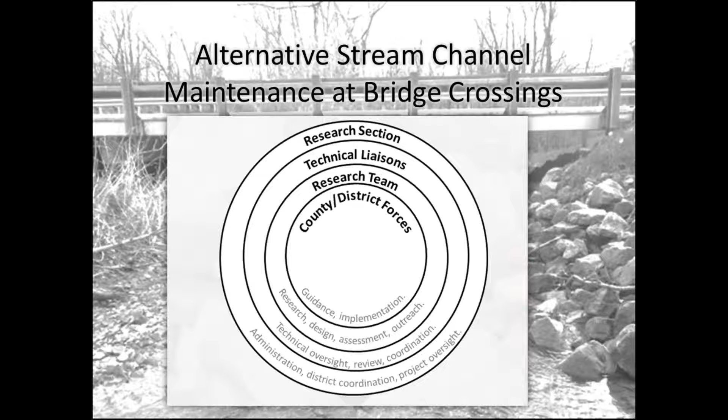The really interesting thing is they started to throw in their ideas. They helped us innovate some of the processes, some of the materials we looked at, and they came up with ideas, and they really contributed to this research in a big way to make sure it was something implementable in the end. So we're greatly indebted to the folks in the counties and districts that participated in this, sometimes even though they were fairly skeptical, but I think we got to a workable endpoint, and now we're going to share some of those projects with you.

Our objectives: first, we needed to assess what were ODOT's current capabilities and the practices they use to do maintenance at stream crossings. So what do they currently do? But also what kind of materials can they gather for these projects? If we're going to ask somebody to do something different, it might require different materials. What sort of equipment do you have to do the work? What's the skill of the workforce to do this sort of thing? So that was our first step, to assess what current capacities were.

And then we started to do the literature reviews. We looked at our experience in the stream restoration field, what sort of practices could we bring to bear to come up with more sustainable maintenance solutions at bridge crossings, where streams were impacting foundations, abutments, the embankments. After we went through and got a fairly narrow list of projects that seemed doable, how do we develop a decision aid or a tool to help guide engineers or county workers towards the right practice to address a particular problem?

We worked with EMH&T to put the designs on paper, get feedback from the counties, but then also go through some of the permitting processes that were required because this was federal funding. This is a point where Dan came in and worked very extensively on site with each of the counties to implement these projects. And then he's documented that whole installation process as well as how the sites are progressing since they were installed.

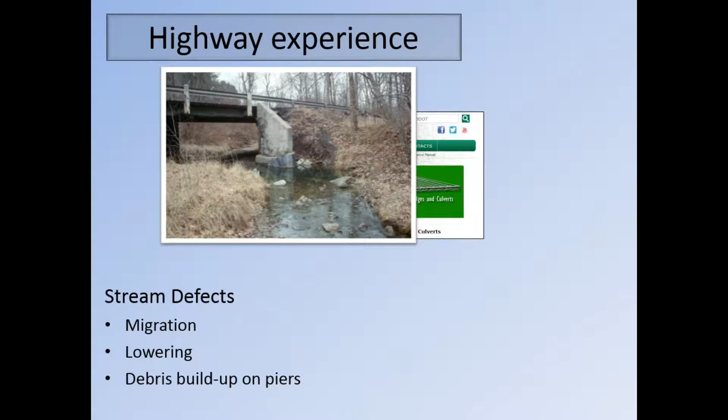So here we go - here's the migration issue. You can see the outer banks eroding into the embankment, causing a problem for the stability of that bridge. Here we have an example of lowering, more sediment being transported than can be supplied, which could cause an issue for stability, as well as debris buildup on piers. You see a lot of this - I know the county maintenance forces are challenged by some of this, clearing log jams so they have adequate capacity and can limit flooding and stresses on the structure.

And there's a lot of guidance out there on how to deal with this. In fact, they're all throughout the peer-reviewed literature, government documents, HEC 23, Bridge Scour - literally thousands upon thousands of pages of things that could be done to address this, and it's almost overwhelming to the point where someone trying to address these issues can get lost in all of this. So what do you do? What's applicable in this region? What are the sort of things that we can pull off? So we help sort through that.

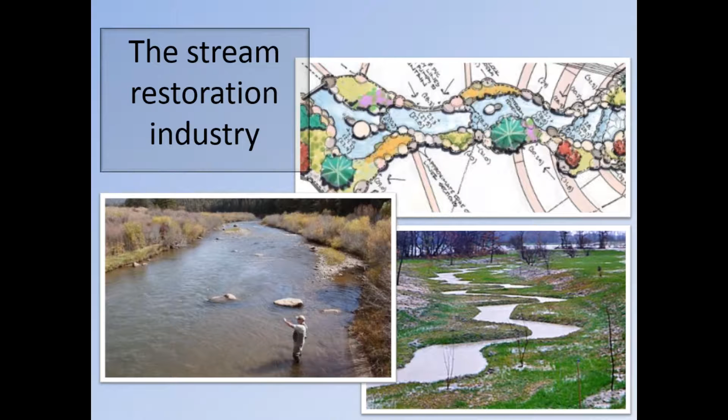A lot of the techniques you're going to see were developed in the stream restoration industry over the past 20 years. A lot of this started out with wealthy landowners wanting to improve the stream habitat for trout, so a lot of the early designs, biologists and ecologists were involved in this sort of thing. But what can we pull from all of that? This is literally a $1 billion stream restoration industry.

A lot of techniques are developed - I know developers now, when they develop a piece of property, may be required to do stream restoration, oftentimes hundreds or thousands of dollars per linear foot. But what sort of lessons can we pull out of all that work and say what applies to streams at bridge crossings, to smoothly transition flow, to transport not only the water and the sediment, and do that in such a way that's going to protect that structure, protect the public, the traveling public.

One of the practices we can adapt is actually guiding the flow. So if you think about that migration issue, are there things we can do to shift and direct flow to keep it smoothly transitioned under that roadway? And vanes, things like cross vanes, J hooks, W weirs - you'll see examples of those in our project coming up. They're able to gently, smoothly transition that flow to where we want it to go.

Here's an example of a cross vane. You can see it's higher on the outer side, lower in the center, and at the bottom there's a flood event. You can see it's directing all of that flow underneath the bridge.

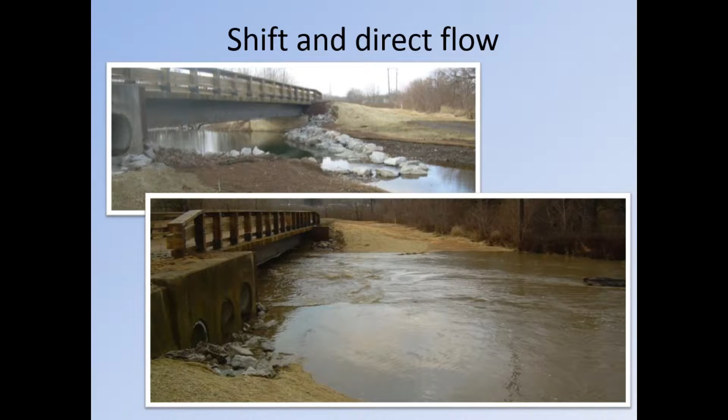The other category of projects we think has a lot of applicability around bridges is the idea of two-stage channels. In an area I work in, up in northwest Ohio, there's a lot of agricultural drainage, and a lot of channels are designed to be trapezoidal, overly wide channels. What we've noticed over time is nature will come in and essentially build a small channel within the larger channel.

That's nature's way of trying to heal itself, to create this compound channel form. The inset channel will usually have faster flowing, deep water because vegetation isn't in there. It's narrow and deeper, and that keeps the sediment moving through.

So how can we use that example at bridge crossings to come up with more stable cross sections?

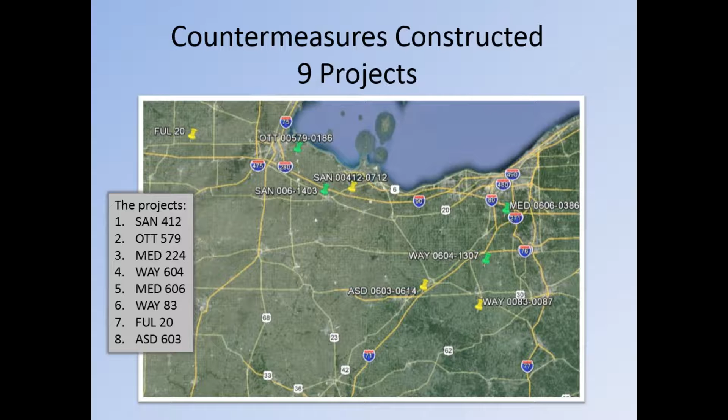There have been 9 different projects implemented as part of this research, and I'm going to turn it over to Dan here to talk about it. You can see they've been across districts 2 and 3, essentially most of the northern half of Ohio, covering 2 different types of areas: a more hilly, rolling terrain in the eastern part, and a flatter terrain up in the northwestern part. I'm going to turn it over to Dan to tell you about each of those projects.

Forgot your coffee, John. Yeah, I'm coming in on the middle of the presentation, and I came in on the middle of the project too, after all the nasty meetings, environmental permitting, and plans and specifications were taken care of. I got to come in and play on the projects. So that's what I'll talk about, these 9 examples where we're applying these concepts that John and I and the team have from a stream morphology, stream form and function background, applied to bridges.

So let's look at 9 projects. This is the first one, and it's in the kind of area where John and I have had a lot of experience: that flat agricultural drained landscape. We certainly know this terrain up in Sandusky County, where bars form and cause capacity issues with the bridge at this site. Let's see if we can get our tech running here.

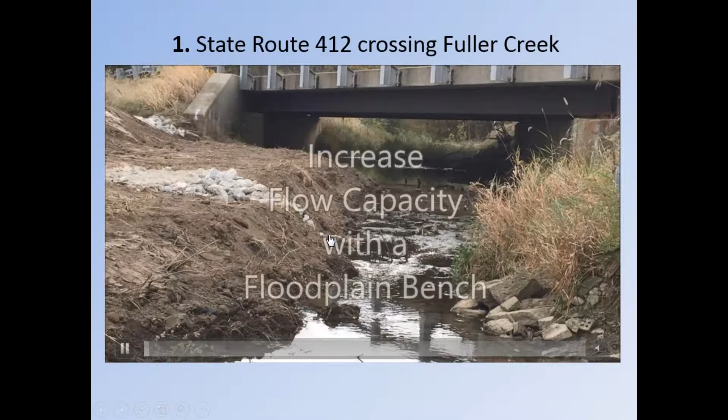I've got videos created for each of these 9 projects. I'll run through 2 of them completely so you can see what they are. For the others, we won't look at so much video, but we will get those posted eventually.

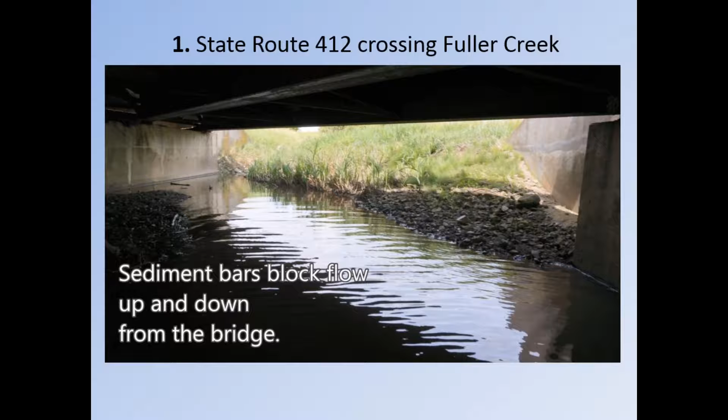Skipping forward and back through this video, we can apply the concept of the inset channel to this landscape, where we have significant deposition obstructing the capacity of the bridge. This graphic shows the height of the bar, extending from one side all the way over, really reducing the capacity of the bridge and causing alignment issues with the channel eroding the far bank, looking downstream.

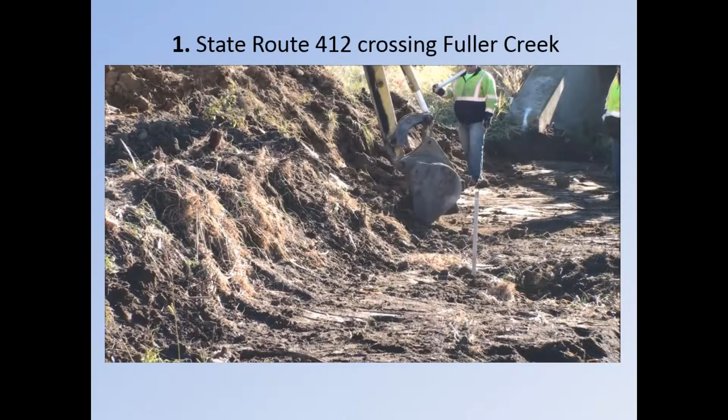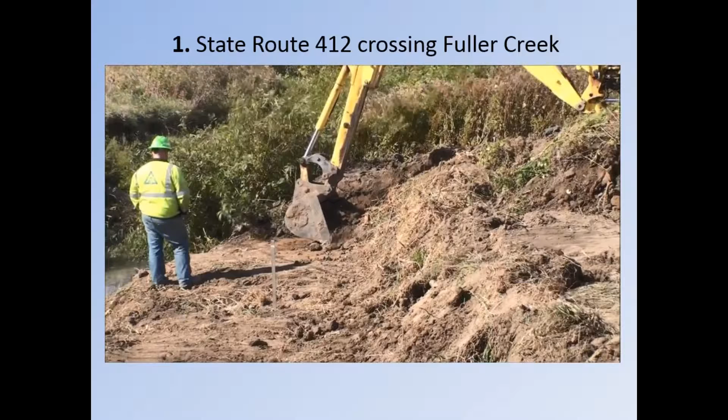So what we do, it's not very exciting, but we dig not all the way down to the stream bed to regain that capacity, but just down to the floodplain stage. That's a very fundamental concept in stream morphology—if we can say nothing else besides this concept of a bankfull channel and floodplain, that's what it looks like in this situation: incorporating that compound channel form so that the low and intermediate flows aren't spread out across the whole base, but confined to that narrower channel. The narrowness isn't so important, but what the narrow gives you is depth.

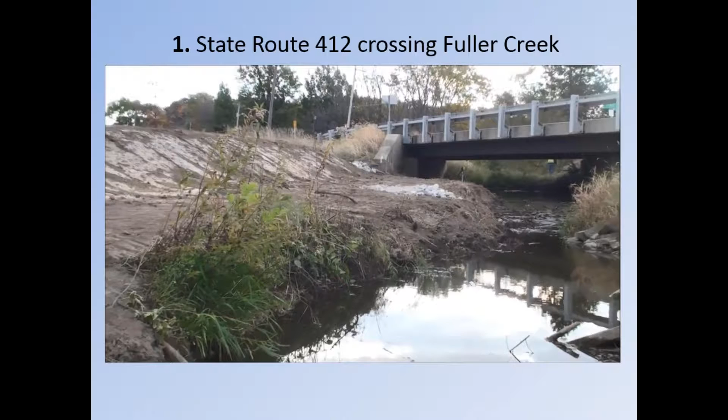Depth of flow gives you sediment transport. So all these low and intermediate flows, which are really about half of the sediment transport through this channel, are going to be concentrated in the deep section, and the sediment transport is going to be improved by this compound channel form.

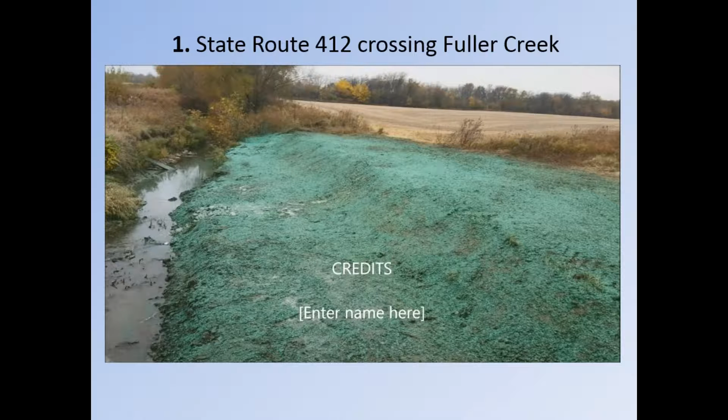So that's what it looks like at this project. Very, very simple. I think I spent the entire time out there, 3 days with the crew, but I don't think I did more than 15 minutes of work. I just think, don't dig any deeper than this, and just pull it back. It's very straightforward.

Simple application of stream morphology to a bridge project. Moving over to Ottawa County, we came in on the tail end of a bigger project here, part of just the stabilization of it, but most of the project was redoing the piers that were badly corroded. And after all that work, the side slopes needed to be stabilized.

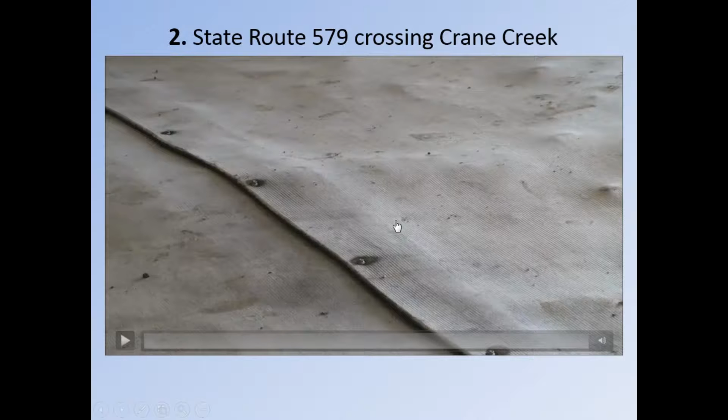You know about stabilizing these side slopes where there's not much clearance, and is there any other way we can come in with materials that might be available to do that and get in there where equipment access might not be so easy. So on this project, we used concrete cloth, which is a really cool material. It's flexible, comes in a roll, and you unroll it, put water on it, and it turns into hard concrete. It's about a half-inch thick, cuts like that, and you can move it around fairly easily with hand labor and a bit of equipment, under the deck.

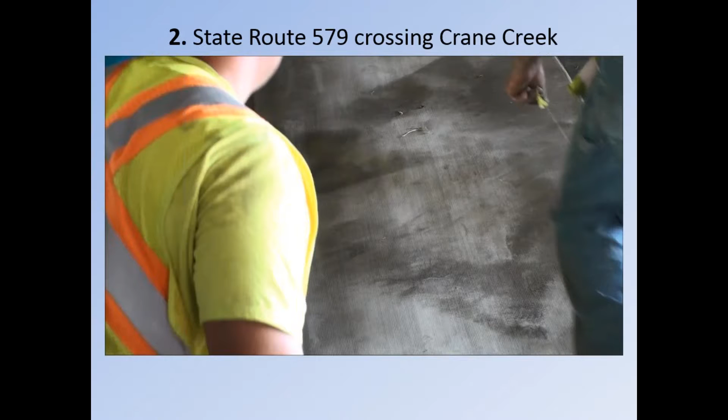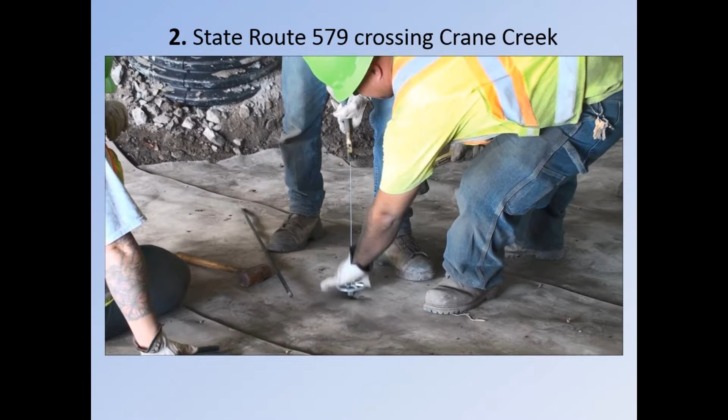Put fasteners just to keep it in place and keep each of the sections that are shingled together, so it doesn't take a lot of strength. It has mass to it, so the water's not really going to be exerting a lot of force on it. And so far, we've had a number of high flows across it, and it seems to be stable. It was certainly easy to put in, so probably not a bad tool to have in the toolbox in special cases where you're dealing with limited clearance like that.

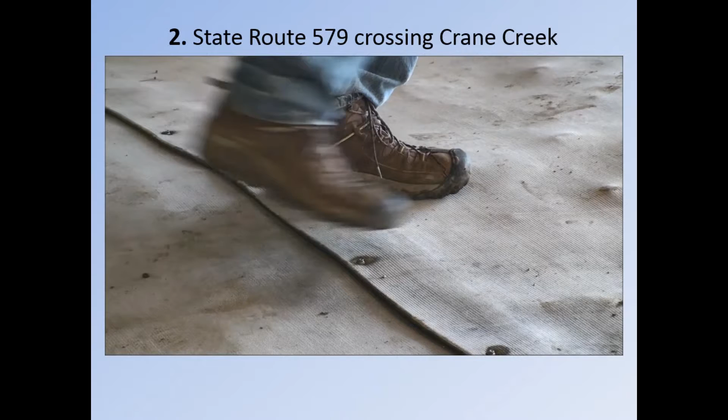Just saturating it - it's concrete within kind of a honeycomb sandwich between two cloth layers. So after it dries, it's hard concrete. You can walk on it with water going. You wouldn't want to drive equipment over it, but it's concrete that's half-inch thick.

And then, of course, it's just that sheet, so you have to key the upstream edges and make sure the water doesn't get underneath it - that would be a probable mode of failure. So that's what that one looks like, and you can kind of see what the videos are about there too.

The other application we had for that material - we liked it so much - was inside of culverts, certainly in access issues here, and where we have corrosion or abrasion of the culvert, particularly corrugated metal pipe, and particularly where you've got messy situations and water, and you might not want to go in and just put tar on it to stop the corrosion. Rolling this stuff out and fastening it to the metal pipe to line the culvert stops the abrasion certainly, and reduces the oxygen back where there's corrosion. Fairly simple application that's been done on 2 projects in Ohio now that I know of, and another application of the concrete cloth.

Now we're getting into some more fun stuff, which is really a very typical kind of issue in northern Wayne County, where it's a stream that has migrated. Streams move. Streams are dynamic systems. We don't call stable streams things that are static - we call their stability a dynamic equilibrium. Meanders move. Outside bends erode, inside bends deposit.

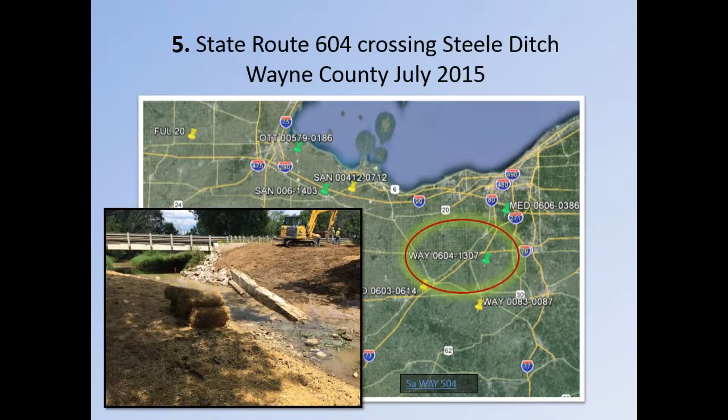Well, the standard practice that's really used for directing flows in stream restoration, that's risen to the top of all the different kinds of practices that are tried, are these vane structures. It's that shape constructed on one bank to direct the flow. Let's see if we have a video of that one - it'll be the kind of the longest project video that we have, but we'll see how those project videos are going to look on this one as well.

So we define the problem at the site, where it's the lateral migration of the channel. The channel's moved from where it was originally, which is now causing alignment issues at the bridge, and scour around the abutment, where continuing maintenance issues are going in and trying to take that abrupt turn and put rock on it and maybe trying to straighten it out. But it's an ongoing problem from that misalignment now. So the first thing we do is realign the channel.

And then the vane structure will be used to keep it in that position. Any material can be used for the vane structure.

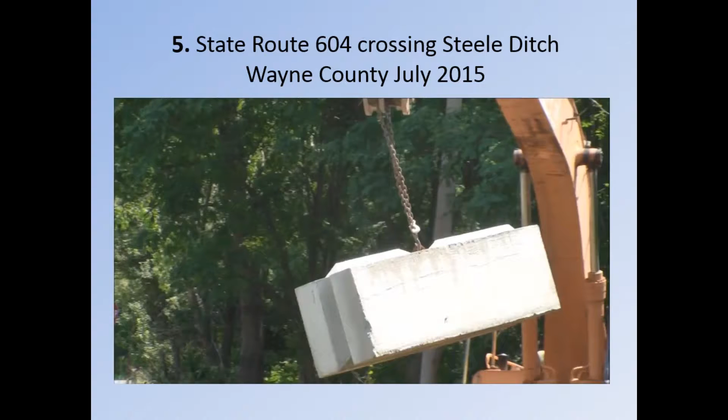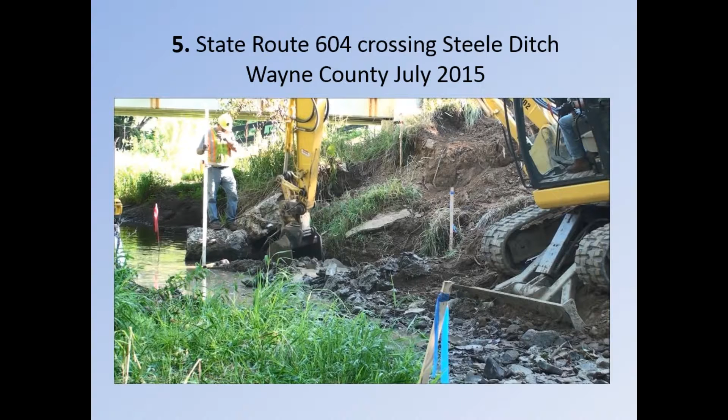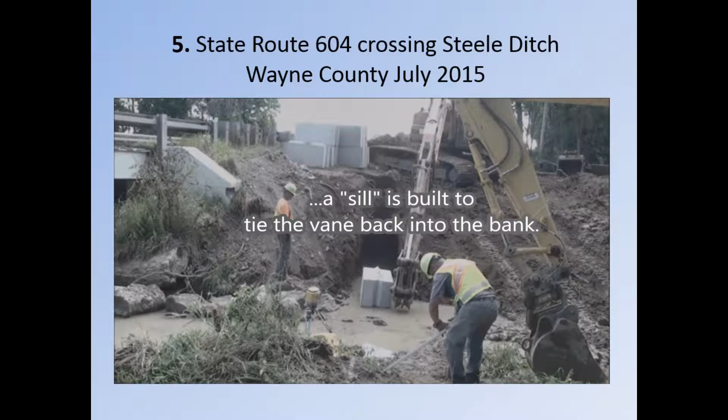Logs are often used. Out west, they use big granite boulders and excavators with thumbs on them to try to stack up those bowling balls of rock. It's a mess to try to make these things out of rock, that's what I say now after working on these projects. Whereas at ODOT, a couple of people said, why don't we just use these big rock blocks, or concrete blocks? And yeah, that's absolutely outstanding material for building this structure. But if you're not trying to build something in a park for aesthetics or ecologically, then from an engineering perspective, the block is just a superior material.

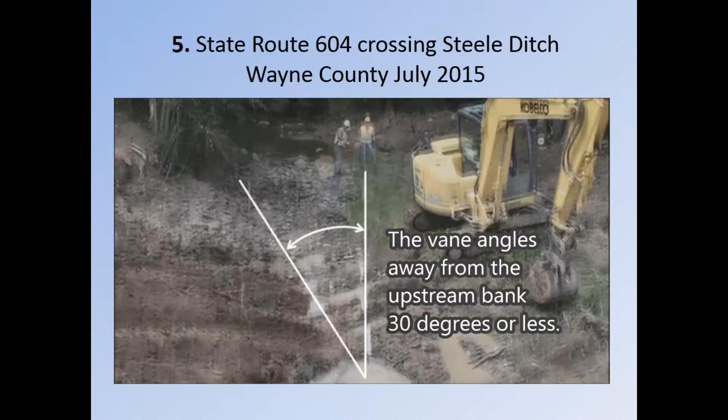This vane is constructed slightly upstream from the bridge, so we're creating a sill back into the bank. The other option is to bring the vane all the way to the bridge itself. The geometry of these things is pretty well refined and modeled, and we've got that angle off of the bank that's been shown should be between 20 and 30 degrees. It's been found to be optimum.

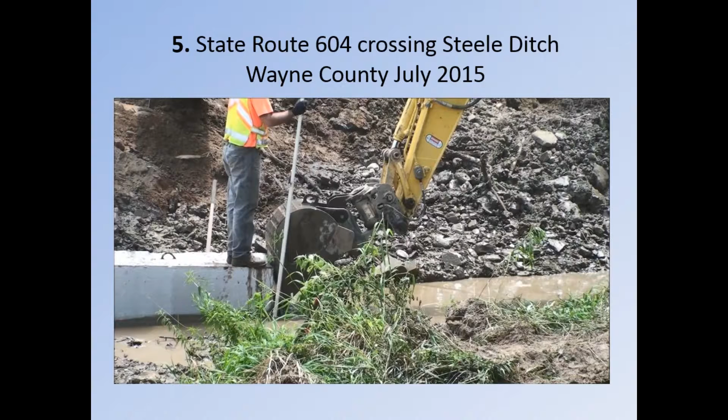They're constructed at a slope with the highest point downstream at about the top of the bank on the downstream end, and then tapering down into the stream bed as it goes upstream at no more than a 7% slope. So 2 to 7% slope is what the slope is, and a 20 to 30 degree angle off the bank, that's the geometry we're looking for. And yeah, it's easy to do that with these blocks.

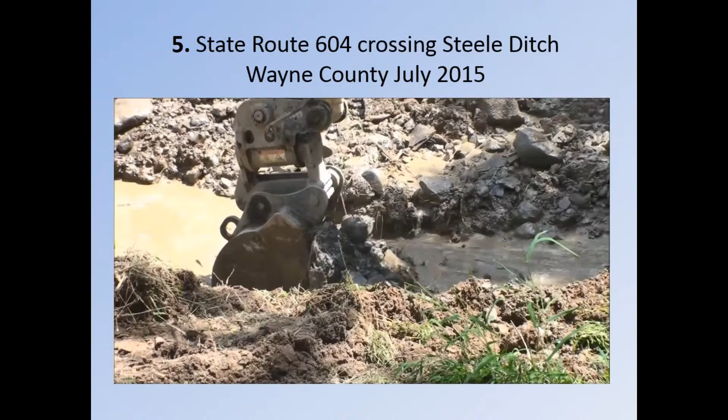Working in the water on this project is certainly one option. Water management winds up being a big deal. In different bed materials, it can be real problematic. So the constructability of these things almost comes down to what are you going to do managing the water at your work site. We tried constructing first just in the water, but decided that was hard enough to work blind down in the muddy water, so we wound up getting a pump to finish this project off. I'm going to start skipping ahead here.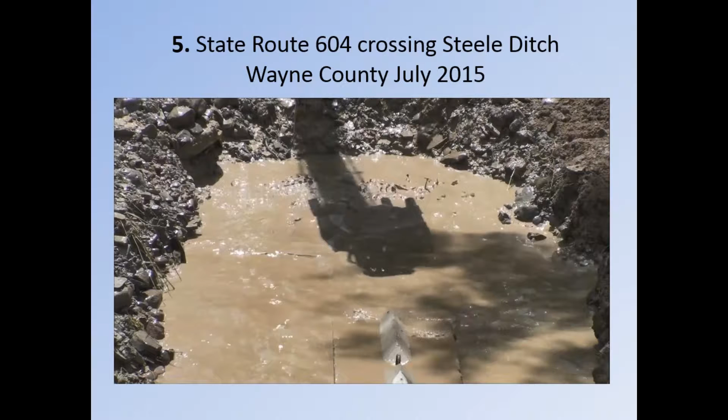And backfilling behind the block, so you stagger the next row up, back behind the footer row, which is what we'll call that bottom row.

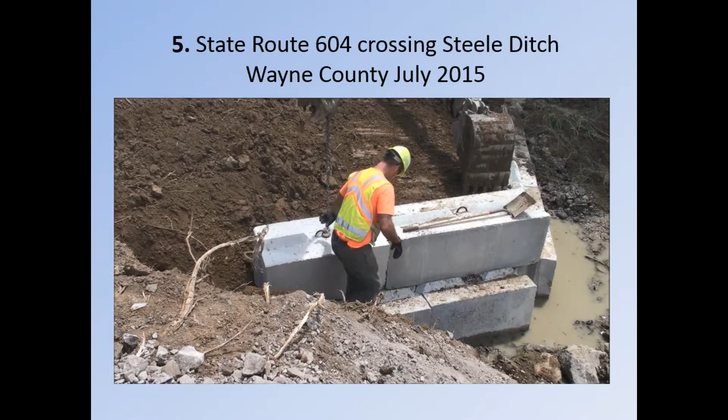It just seems like we're cheating when we're using these blocks with a handle on the top, with the guy sitting comfortably in his excavator, setting them right where they are, spinning them around, compared to trying to wrestle big limestone boulders or granite boulders into position. It's not pretty, but it sure does work. From an engineering perspective, it's a far superior material, developed right here in Ohio.

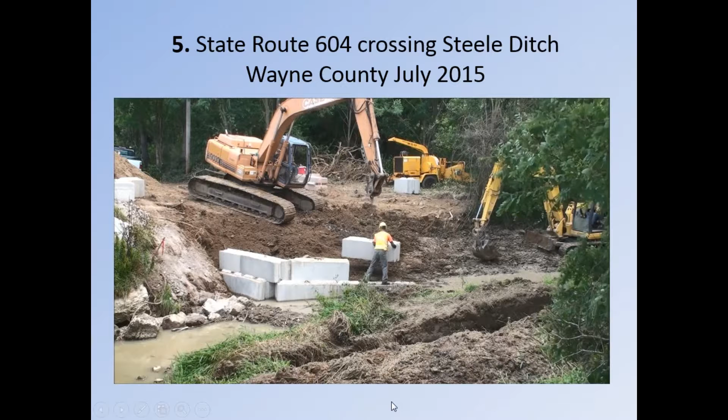There we are, putting that layer all the way out there. So that footer layer has to go down below the maximum depth of scour. One of the modes of failure would be that the water will come over the structure and undermine downstream from the block, and the block tumbles into the scour hole that develops. So the key aspect of the design is to get that footer down below the maximum depth of the scour and then stagger up, build up from that.

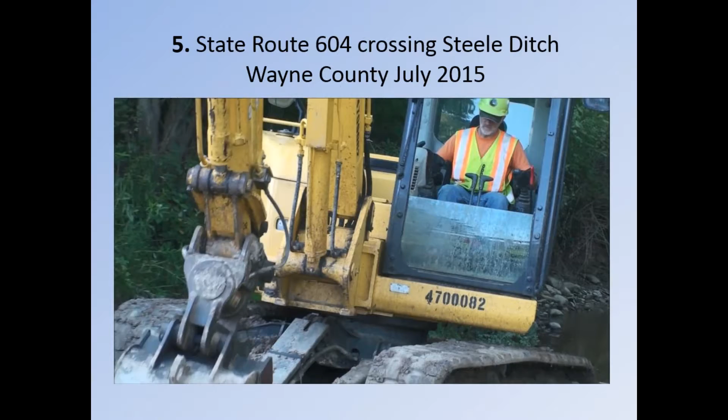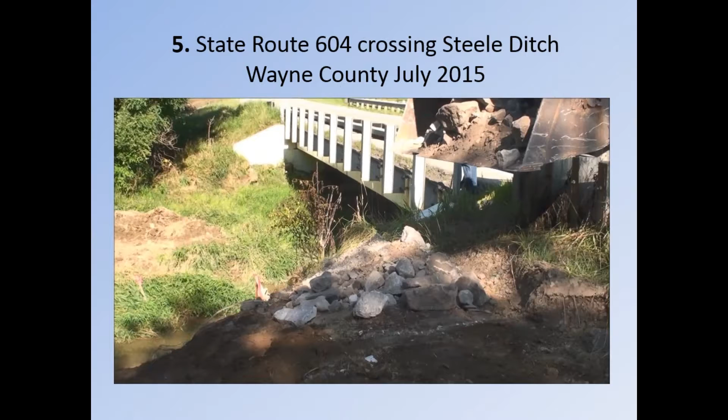There we are, we gave up on working in the water and got a pump out so we could see what we were doing. The other mode of failure on this kind of design where it's tied into the bank is to have water coming up on the floodplain and going around the upstream end of the structure, back down into the channel. The way that they wind up failing is a gully will frequently cut around that if it's not stabilized the way we're stabilizing this one now, by really making sure that water is not going to cause a cut around the upstream end of the structure.

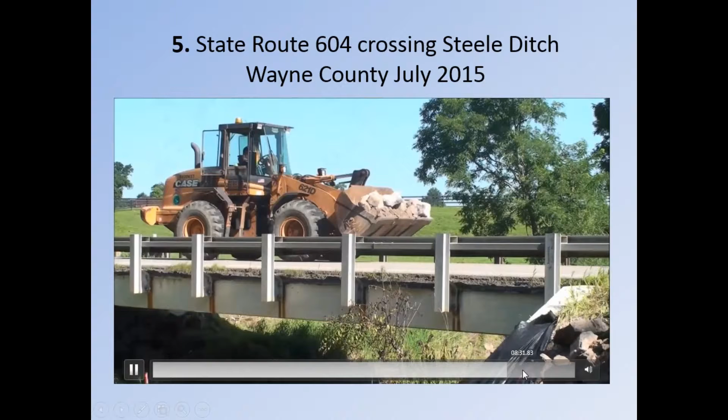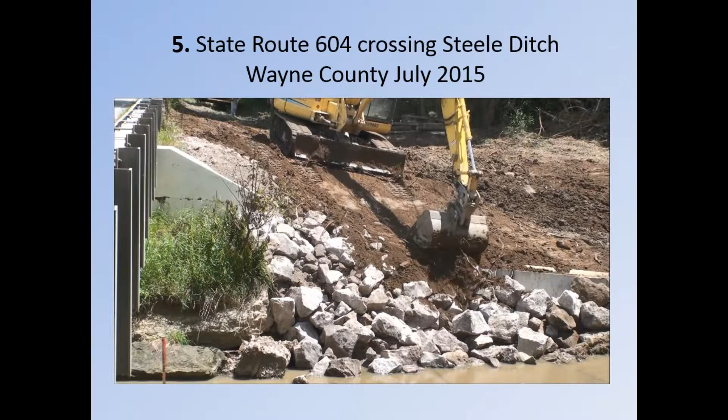So nice good erosion control there, and for ecological reasons, it makes sense to turn it green. We like this practice of doing buried riprap: design the riprap as you need it, put it in place like what you'd need from an engineering perspective to be stable, and then cover it up with soil so it turns green. Seems to be one of the nicer ways for actually getting vegetation around streams.

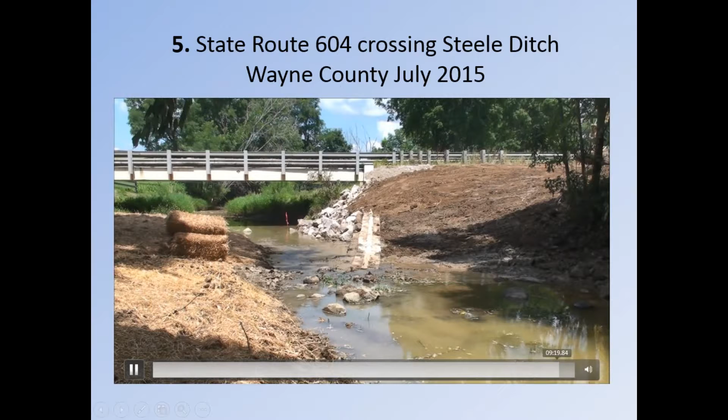As far as what we have to say today, this is a really bread and butter kind of application. A single span bridge where the channel's migrated off to one side, and we realign it and keep it aligned where we want, keeping the flow aligned with the bridge by putting in a vane structure, or some variation of vane structures. So there's our standard practice.

Moving over to Medina County, we've got a real high bed load stream flowing under a 3-span bridge that we constructed in 2 phases. The first phase was under the deck, to get the channel aligned the way it needed to be. Working under the deck, we've got clearance issues like we always have doing maintenance under bridge decks. So we tried this little remote control loader, which I think the guys had a lot of fun with. It works.

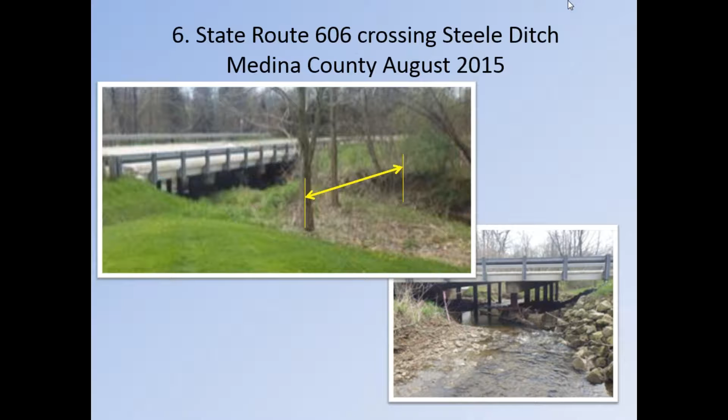The channel didn't narrow itself up, didn't form a floodplain in that compound form right down the middle like we might have hoped. Instead it builds a bar on one side and a channel on the other, and the bar continues to form and drive the channel migrating into the bank, making a bad situation worse and worse, until it washed away material on the side slopes, even around the piers, causing poor alignment—one bad thing leading to another, all starting with that over-widening of the channel upstream rather than appreciating that compound bankfull form.

So the first phase was with the little loader, getting the three-span bridge right—the bridge design manual talks about using the middle span for the channel and the main flow, with the dominant flow not around the piers and not off in the side span. So most bridges are probably designed, if they follow that guidance, to have the middle span correspond with the bankfull channel or main channel, with the side channels available only for higher flows.

So we put rock back in where it had eroded away, to recreate what is already in the plans, what is already in the bridge design manual—that cross-sectional shape underneath the bridge being a channel through the middle span with the side spans available only at higher capacity.

You can appreciate the importance of that for sediment transport on a stream like this, where making something too wide also makes it shallow, and shallow flow doesn't move gravel—it drops out and forms bars.

We know all that, and we set out to do that in our plans, even saying to do all that, and we got to the second phase, and this is where the plans were saying to put the toe of that right bank—and look where we're digging.

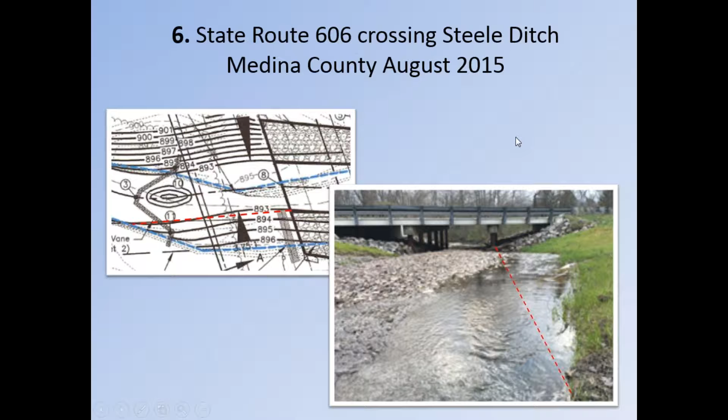Moving along to another project in Wayne County, where this is another channel that migrated off to the side, so we've got to redirect it back into the alignment that we need. This one's at a two-span bridge. So it's a little bit different. My video going?

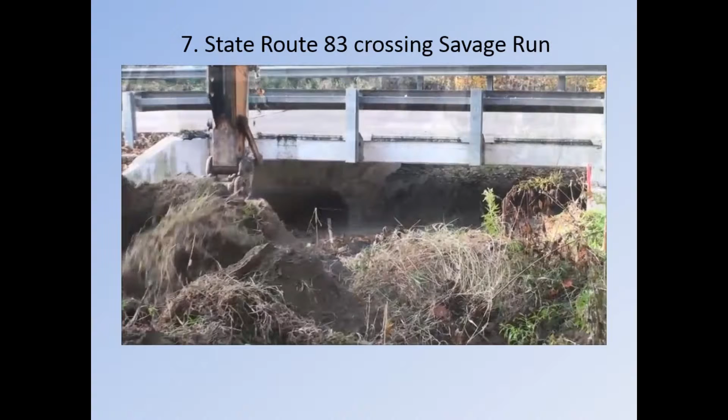So both spans here probably were initially designed to accommodate the design flow. Our bridge design procedures, drainage design, or bridge design manuals will talk about bridges having the design criteria. It will be a recurrence interval storm. So bridges have to be designed to pass some major amount of water, some rare storm event, which is fine. I don't want the roads to flood, but water is one of two things that bridges can be thought about having flow through them. Sediment being the other one.

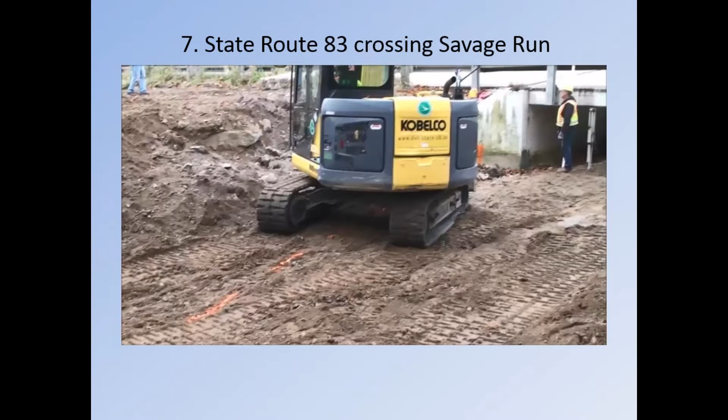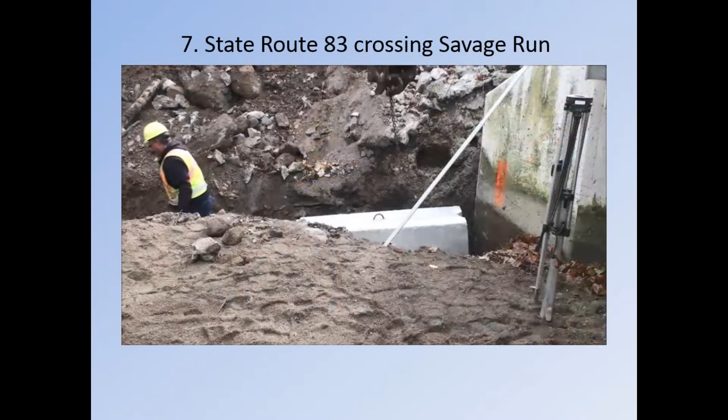Bridges will be designed for water, and more often than not will fail or require maintenance because sediment transport wasn't thought through and designed well enough. So we've got a 2-span bridge here. I'm constructing the vane the same way as we've already seen the other vane constructed.

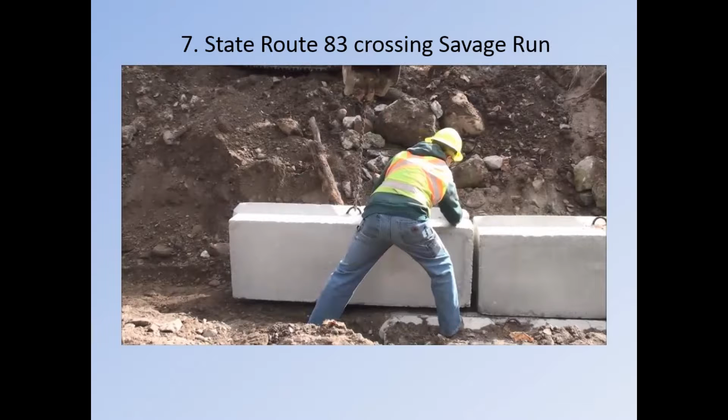And we didn't excavate out to the original capacity of both spans, we left the second span as a floodplain span available only for high flow, and we're going to keep the low and intermediate flows directed with the vane and armoring that we had in there to go just through one of the 2 spans. So the 1 span is similar to the bankfull channel, so it works out well in this project.

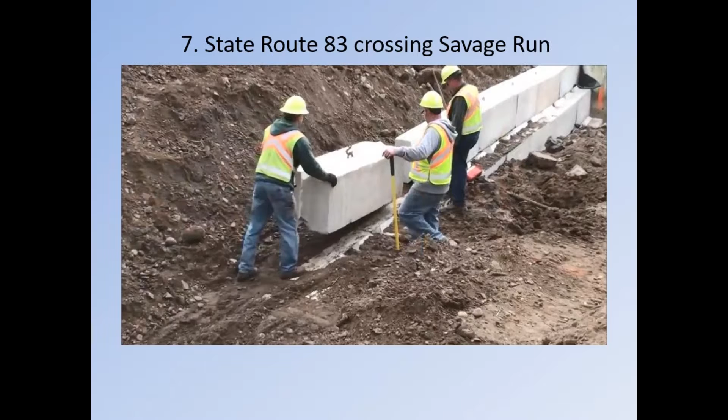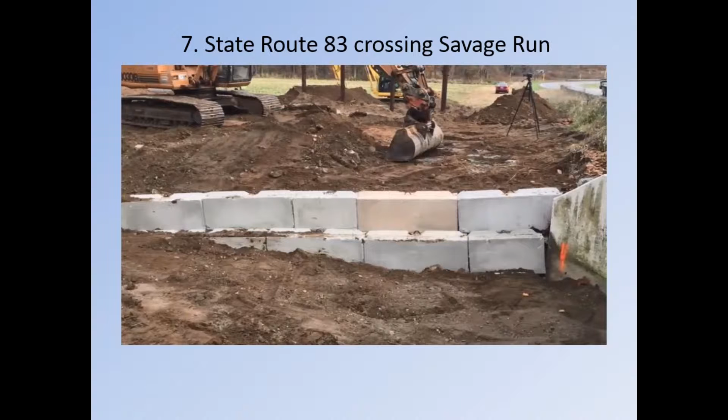The 2 spans are far wider. If we want to construct a channel that is twice as wide as the natural channel out there, it's going to be working to maintain itself at that width, it's going to adjust. So that's the first element of this project, it's staged culverts, or a floodplain culvert, where the one culvert is going to accommodate the low and intermediate flows, and the additional capacity will be over a floodplain and accessed only during high stages.

So there we are, excavating only part of that floodplain, that bar off, leaving the rest of it as floodplain, and there it is after a period of time, after a year of high flows, with the alignment right. And this is looking upstream now. We didn't do any work downstream from this project, we just realigned it, kept the compound shape upstream.

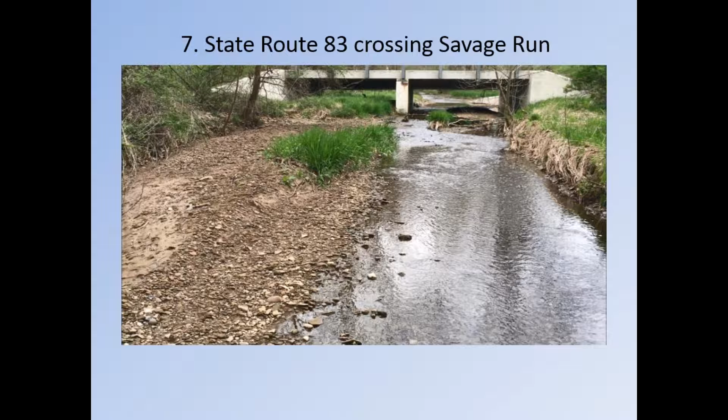Downstream is actually where there was probably more of a fundamental problem going on, or that's where the problem was being realized, because of the alignment problems upstream, the flow was turbulent enough through the culvert and downstream that there was a significant bar that formed down here. There was a bar really from here all the way across to the vegetation there, and the water was spread out across this entire channel.

The limiting factor on this one, I would submit, resulted from the aggradation downstream that was resulting from the poor alignment upstream. As a result of straightening the problem out upstream, that bar has gone away, and this channel is in a tough spot in the watershed where it's got a fair amount of gradient to it, and it's coming back down to the Killbuck, that lowlands, broad wetland valley.

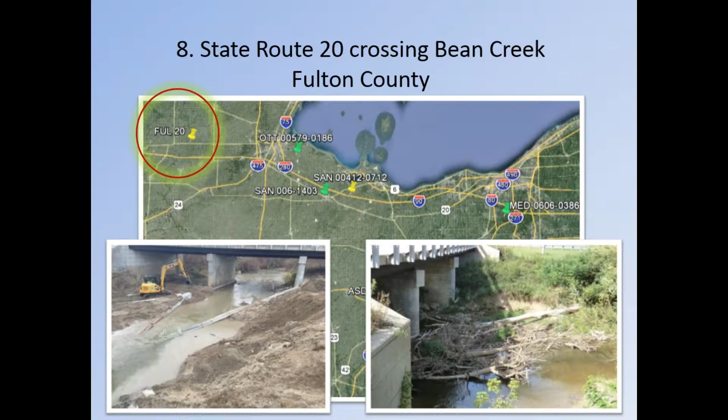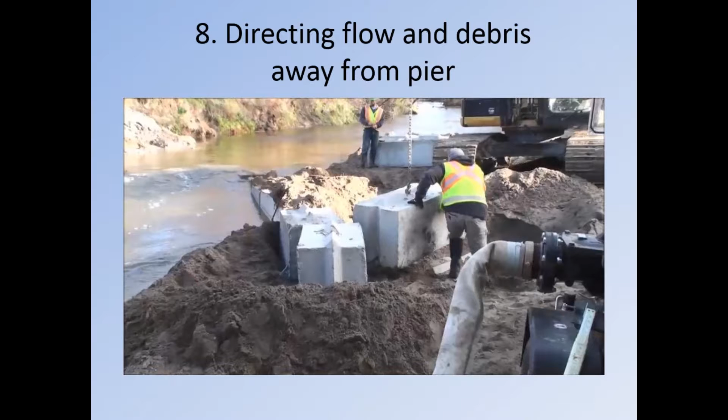We're going to use a vane structure again, actually a variation called a W-weir. It's going to direct flow just like a vane does. It'll be at that 20 to 30 degree angle, just like a vane, at a 7% slope. It's configured so it's set upstream from the pier, and the water rides up on that triangular shape and rolls off the sides gently without turbulence. We know how to direct water where we want it to go. If we want water directed not at a pier but through the clear span, we can do that, and this is how.

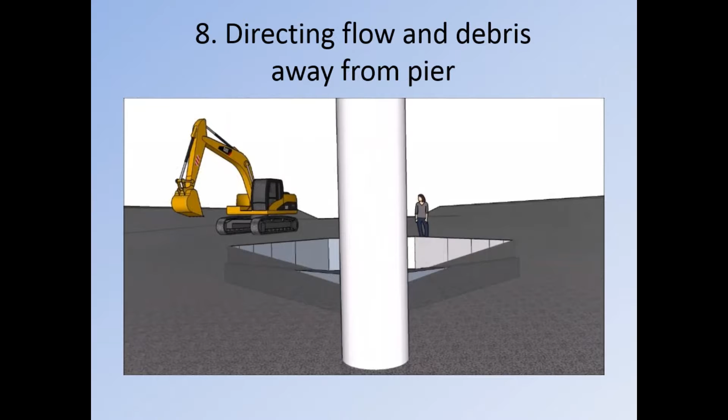This is a real standard practice: if you want water to divide and not carry the debris it's carrying into the pier, you put in one of these things. So it's under there - maybe the top of it is a foot submerged at this flow.

It's really just amazing. I think the best perspective is to be standing on the bridge over the pier and watch the water coming down towards you, with debris and things in the water. On this one, one of the videos I'm planning to post is where I had my camera set up above the pier and then ran upstream with a bag of oranges, which is the standard tool for fluvial geomorphic measurement and observation in the literature. Oranges sink down into the current and follow it. The wind doesn't blow them around. Bright colors so you can see them, but not plastic or anything that's a problem.

So I took my bag of oranges and threw it in directly above the pier - a shotgun of oranges coming down at me, and just gradually, no turbulence, no big deal, they just kind of split and go off between the spans. That's one of the things we get from this particular design: we don't want back eddies, we don't want turbulence, we want just that subtle shift of flow.

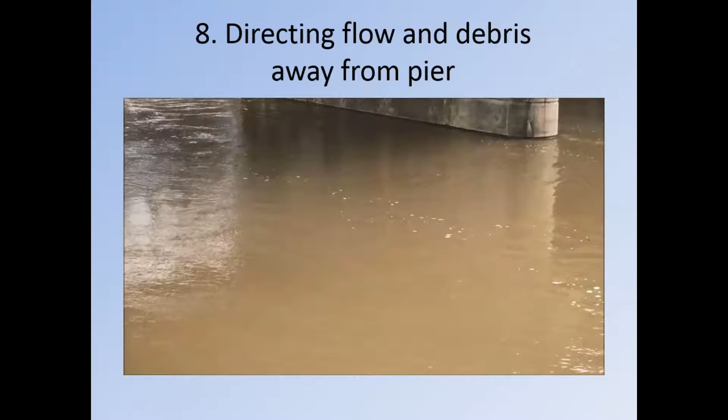A really fun project for demonstrating that, because I know on other projects we've looked at, debris on piers is a common problem.

The most challenging project we worked on by far was at 603 in Ashland County. This is at a very difficult point in the watershed, a real steep watershed with high banks recruiting a lot of coarse material, a high energy stream, coming down to a Broad River floodplain that's been dammed. So it's got backwater from a reservoir: reduced slope, reduced sediment transport. That transition from high energy to low energy is right where 603 crosses it. So there's nothing that stream wants to do more under 603 than fill in with gravel.

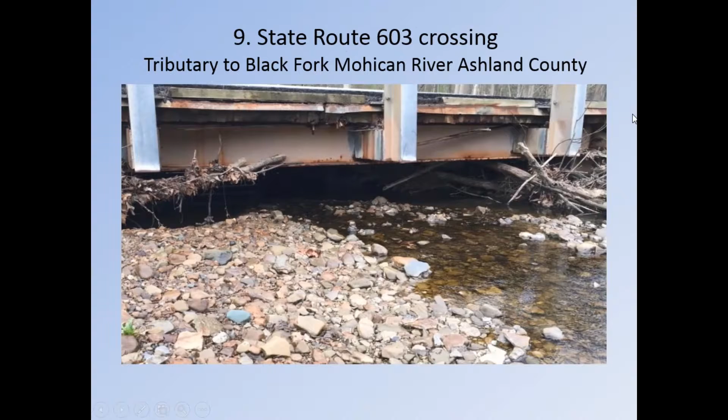So that's how to maximize sediment transport upstream from this thing. We use the vane structure again, with a variation called a cross vane. The way we build those is dig down below the maximum depth of scour. I'm not going to use anything except these blocks anymore because they're so easy to put in there, and from an engineering perspective, they are sound.

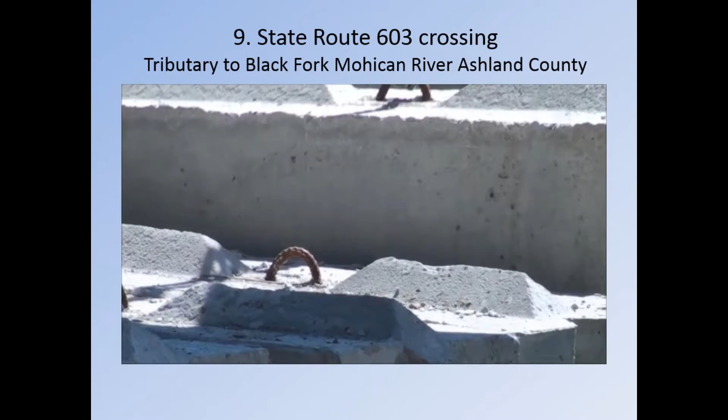I'm sorry you have to look at lots of videos of me very excited about hooking the handle on the block and moving them around so easily, because this is a big deal if you've ever been involved in a project trying to use boulders.

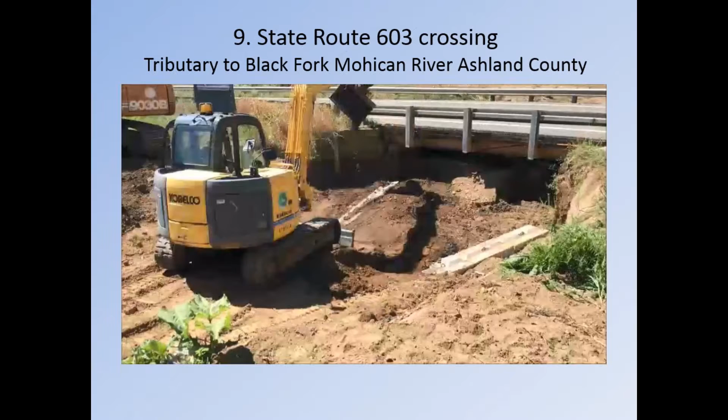So we're down below the maximum depth of scour, putting these footer blocks down. It's highest at the downstream end, so we actually have 3 blocks stacked up there on top of the lowest ones. We looked at the one project where the vane stopped upstream from the bridge.

I think probably the better design is to bring the structure right to the abutments or right down to the bridge. Fairly straightforward, stacking up the blocks.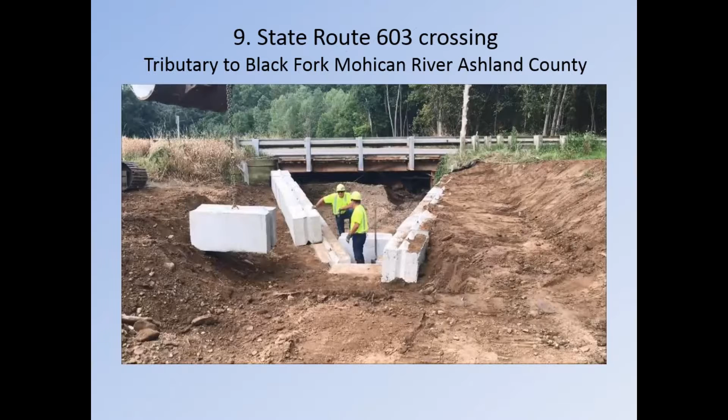What we're trying to do is accelerate the flow and have that maximum concentration and acceleration right at the entrance to the bridge, so it can scour a hole rather than a bar right at the entrance to the bridge. That's what we built this thing hoping to achieve.

So, where it was and what we've got to do for that.

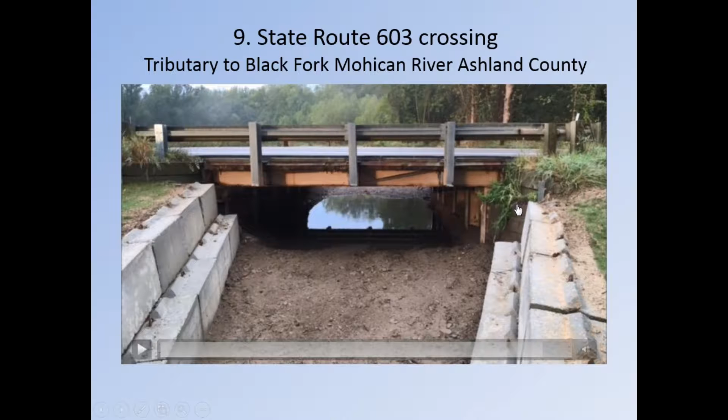We're using a lot of the stream's energy focused at that point to move sediment, rather than taking the channel upstream in the bankfull channel and, in a dynamic equilibrium, moving things around, widening out, slowing it down and taking its energy away. No, we're trying to put that energy right where we want to use it to move the sediment through.

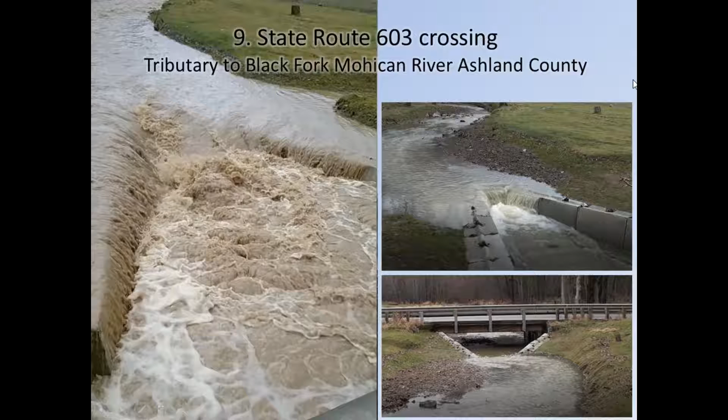That's the first half of what I want to show you. The second half is, after these examples, what do we have to recommend—lessons learned from the stream morphology and river engineering perspective, rather than the bridge perspective.

It's where these two cross. What do we have to recommend? From the stream morphology perspective, the way we think about streams is dimension, pattern, and profile: cross-sectional dimension, meander pattern from a crow's eye view, the slope or longitudinal profile, and the materials.

So let's go through and organize some recommendations from that perspective, starting with the last first: the materials. There are some really fun materials out there, and any of the erosion control magazines we get are worth exploring—there's a lot of good things out there.

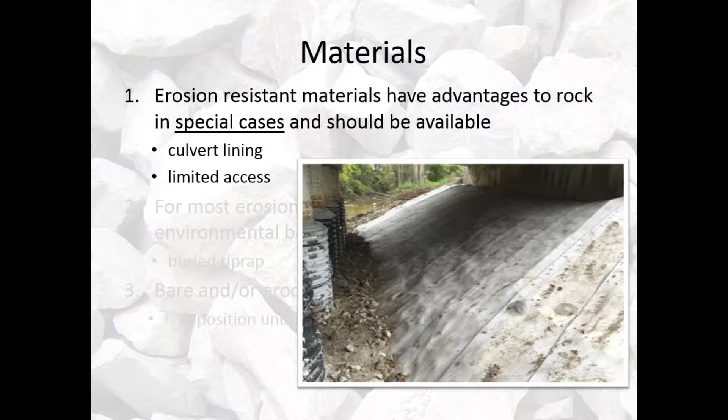We liked using the concrete cloth, especially in special cases where there's limited access, like culvert linings, and I don't know what else you'd really use there. But I think we can conclude these erosion-resistant materials are probably limited to special cases.

Other materials like Flexamat—you don't really need to recommend much about that. I don't see lots of projects out there using it. It's got its place, and that's fine.

And then I think we enter a whole other arena—a whole other toolbox of ways of making bank material more resistant to erosion, coming from the stream restoration perspective.

If you want to make an erosion-resistant bank that will also be really good trout habitat, you've got a lot of tools to choose from, and that's fine. There will be places on highway projects for lunker structures, delta veins, willow posts, and all kinds of things, and in this case, coir or coconut rolls—good bioengineering kinds of things—especially where you're trying to restore a stream and recreate that dynamic equilibrium, letting things move around eventually after the trees have been planted, just recreating that natural dynamic.

We don't have a natural dynamic around bridges—we've got a fixed point. And rock and concrete, I think, when it comes right down to it, have a lot to be said for them when it comes to engineering these fixed points.

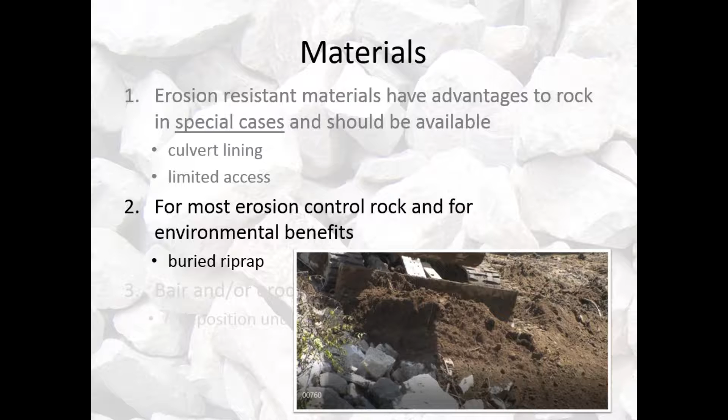Another kind of oddball case, well maybe it's not oddball because we kept seeing it on different projects we went to evaluate, was the bare soil underneath the deck. We don't get vegetation on that stuff, and you get gullies in it and erosion. So how should it be fixed? Our recommendation is, well, does it need to be fixed?

What we found more often than not was that the side slope had been stabilized with rock, and maybe it was a bit wide, or the channel shifted to one side or the other, and deposits of silt ended up over the top of the rock. Those deposits are under the deck, they've got shade, and they're not going to turn green. So bare deposits of silt at high flows, you're going to get erosion in that silt. But what actually is the problem there? I don't think there's any problem for the bridge.

The solution I would recommend not doing is trying to stabilize the top over the silt. So you've got a silt sandwich with the original riprap underneath, then silt deposits, and then some kind of stabilization to stabilize the deposits. Maybe you want to do that, but I think you should think hard about what the actual problem is that you're trying to solve by doing that.

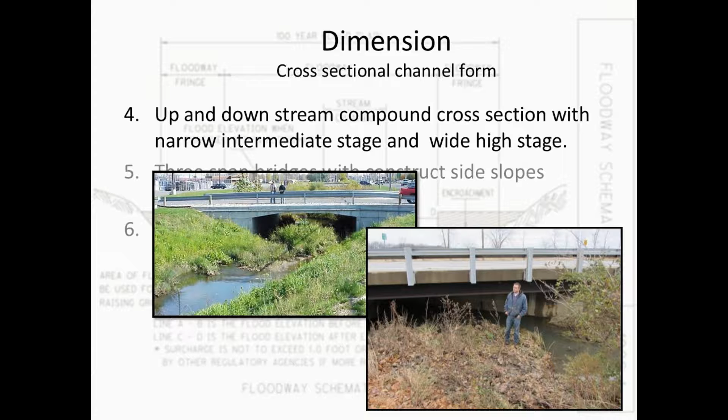Dimension, okay, number four here - if we could say nothing else today, it's that the bank full channel is frequently not considered when constructing the channel dimension, the cross-sectional dimension in the vicinity of the bridge, upstream and downstream. Over-widening a section of channel reliably results in a bar forming and a smaller bank full channel forming to one side, causing poor alignment. That's such a common issue that we want to draw attention to it, so it doesn't get overlooked when things are actually moved around.

This is a project up in Wood County where, in the right picture, the entire area was over-widened, and the same process occurred - a bar formed, channel shifted to one side. If instead we could respect that bank full channel, or utilize the hydraulics of that bank full channel for sediment transport and stability, it might look something more like the image on the left, where we're designing the channel so that low and intermediate flows are narrow and deep, and we get the capacity we need at a higher stage.

For 3-span bridges, what does that look like? Well, it's already in the specs, but it's overlooked too often, where the side spans, are only accessed during high flow, and the low and intermediate flow is directed through the mid-span.

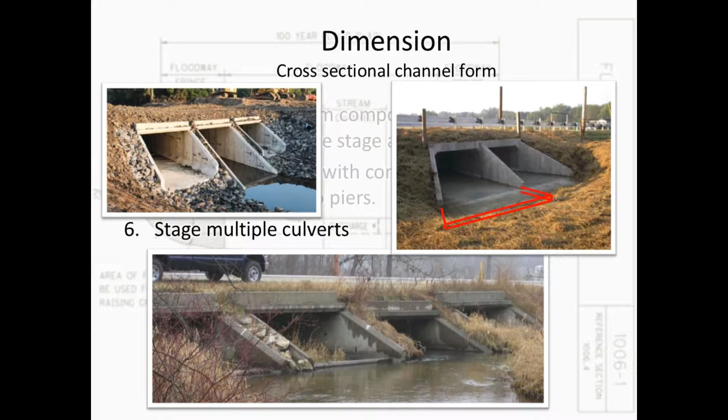Okay, dimension, pattern, and profile. Did I mention not to widen out the channel upstream from the bridge? It's going to mess us up in all different kinds of ways, including pattern. But if we could say nothing else, I'll go back to that recommendation: don't do that, because of the things it's going to mess up, it's going to be pattern and alignment issues.

For directing flow, we've got some really good experience and really good tools, and the bread and butter tool in its different forms is a vane. So a vane, or a cross vane, or a W weir, we can direct flow around. Works really nice, I'd say particularly at bridges. The vanes are structures, so they're fixed in space. They're also fairly short compared to the effect that they have. So along a bridge, in a road right-of-way, where we can be working at the bridge, but pattern—that's a pretty long section of channel that is actually involved in the issue here.

Vanes will, as the water rides up on the vane, reduce the slope on that bank. And upstream, the length of the structure further upstream—maybe even two—you'll have reduced slope, reduced velocities, reduced shear, reduced erosion, affecting that pattern well upstream from where we're actually having to do the work. So maybe being able to limit the work to the right-of-way, but addressing an issue that is on a longer stream reach than the vane construction itself.

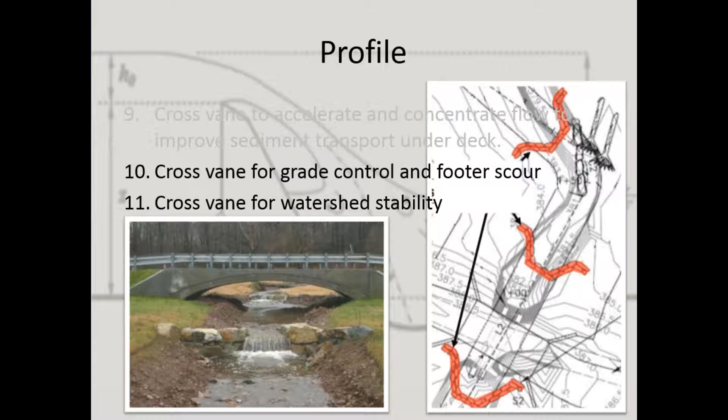I had an awful lot of fun making these things. It's fun playing out in the stream and playing with the water, using its energy to do stuff. I hope you do too.

All right, we are, I guess, open for questions. Is that it? Are you guys ready? Okay, we have one question that's come in over the chat box. Okay, one question, one comment.

The question came in: how do you prevent undermining the concrete cloth, particularly at the leading edge? By keying it in—our design for that was to excavate down a 1.5 foot trench around the perimeter, even on the downstream edge, but especially on the upstream edge, laying the cloth down into that trench and then backfilling the trench with rock.

On the design, on both the culvert design and the Ottawa site that was under the deck, there was concrete on the upstream end—on the culverts, on the head wall. And there was a little concrete apron on the Ottawa site for part of its length. So we had that solid piece of concrete that we put the cloth over the top of and fastened with screws into the upstream facing surface of the head wall and that concrete apron. That's certainly the mode of failure I anticipate being most likely, and it needs to be addressed however it can be. That's how we did it.

Okay, I was just imagining there's a microphone somewhere, right? It's a phone. Yeah, it's a phone. Oh, what an interesting microphone.

So that last project we were looking at in the slides had 900 feet of channel involved, certainly justifiably more permitting. I think the more typical projects, not only ones we were involved in, but problems people wanted addressed, would look like this: a single vane just on the upstream side of the channel or upstream side of the bridge, and some in-channel work.

We've done videos because we don't want this to sit on a shelf. We want to use it. That's why we're doing the streamlining with the permitting. Our maintenance crews did an excellent job.

What you did not talk about is all of our county garages, when they go out and look at a job, have to look at force account limits to decide whether they should do the work.

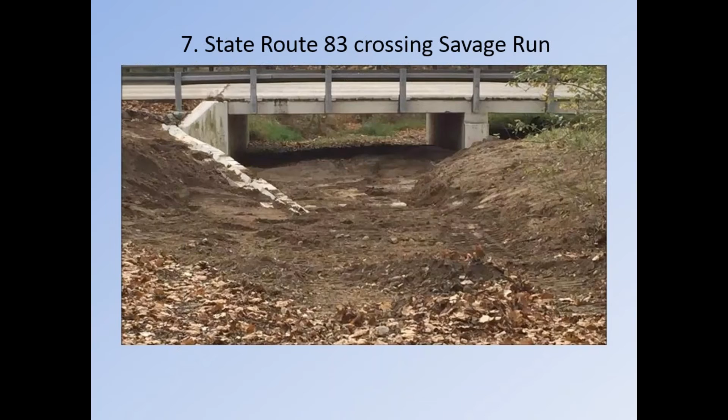So, Dan, if you wouldn't mind going to the very end. I don't want to cut anybody off. Do we have more questions? Michelle, do we have questions?

Yes, you've got a two-part question coming in. Are you using any rock and infill between your vane arm and the stream bank, or just compacted soil? No, I went at the very end.

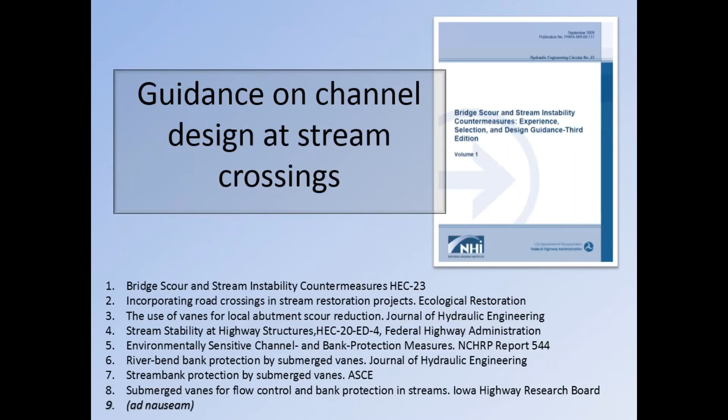I went to the very beginning. Yeah. The other end. Will you read that again?

So the question was, are you using any rock as infill between your vane arm and the stream bank, or just compacted soil? No, unless we're talking about material like gravel that might be excavated from the stream bed. So it's whatever material we have on hand that's put back there. Again, with the exception of just downstream from the structure, if we're tying the vane into the bank with that arm going back into the bank, we don't want water going over the floodplain and falling down into the channel just downstream from the vane.

So that bank right there, definitely rock. We had one example where we went to good effort getting the riprap design between the bridge and the vane, downstream from the vane. Kind of upstream from that point, no. And I don't believe there's even a need to put any fill in there.

We put fill in there because we've got more than enough material on hand, and just to get things to balance. It's kind of almost spoiling it in there—a fine place for it, but I don't think it's necessary for the hydraulic functioning of the structure. And the way the flows work, the high flows are pretty quiet on that bank. If anything, if we didn't put any material there, I suspect we'd have deposition, building the bank up there.

Second part of that question was, have you seen any issues with the stability of your vane arms, or have they been fairly stable and remained vertical?